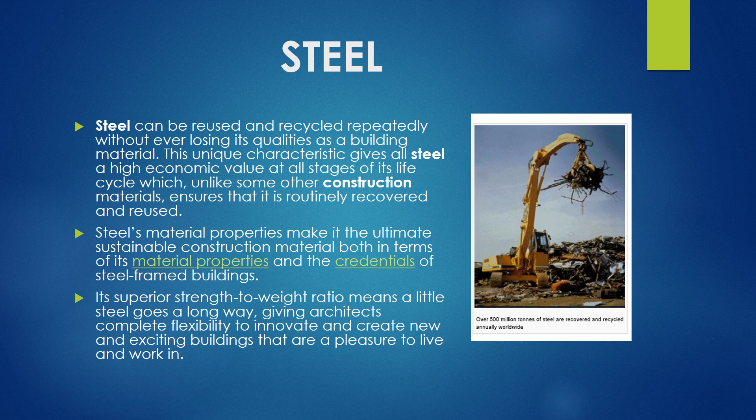Sustainability, green buildings, is our next topic. Steel is one of the most sustainable building materials in the world. The industry has embraced the common sense approach that reducing its impact on the environment is not only the right thing to do, but it makes economic sense. Since the early 1990s, the steel industry has reduced its energy use to produce a ton of steel by approximately one third. More than 95% of the water used in the steelmaking process is recycled and returned, often cleaner than when it was taken from the source.

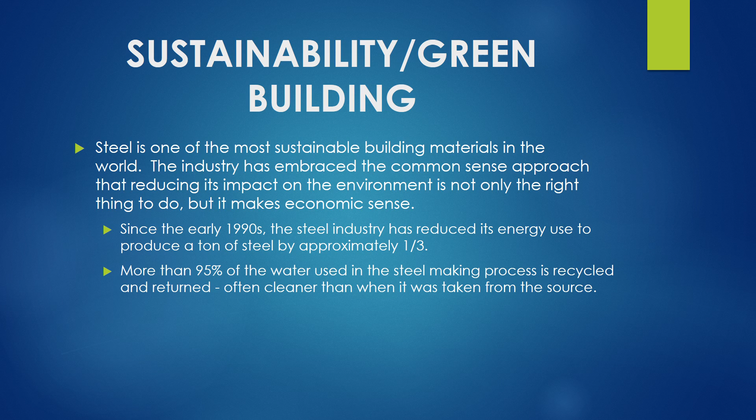Now for sustainability. Structural steel is the premier green construction material. Its high recycled content and recycling rate exceed those of any other construction material.

Over the past three decades, the steel industry has significantly reduced greenhouse gas and overall emissions. While numerous legislative and regulatory efforts in recent years have targeted emissions, energy efficiency, and related environmental concerns, the structural steel industry has been proactive in pursuing measures that typically exceed regulatory requirements. As the green building movement grows, more and more building owners, architects, engineers, and contractors are realizing the benefits of selecting structural steel framing systems as a means of meeting sustainable design and construction goals.

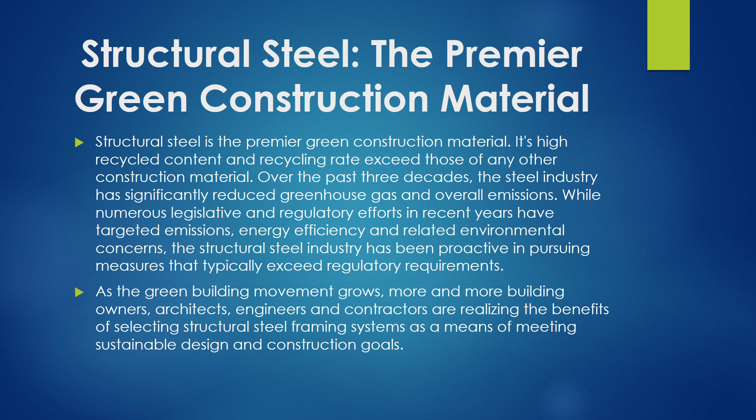The LEED Green Building Rating System, developed by the U.S. Green Building Council, has been crucial to this movement, and under LEED 2009 and V4 criteria, structural steel receives maximum credit for its contribution to the overall rating for a structure, due in large part to its recycled content, recycling rate, and transparency. Structural steel produced in the United States contains 93% recycled steel scrap on average. At the end of the building's life, 98% of all structural steel is recycled back into new steel products, with no loss of its physical properties. As such, structural steel isn't just recycled, but multi-cycled, as it can be recycled over and over and over again. It is truly cradle-to-cradle material.

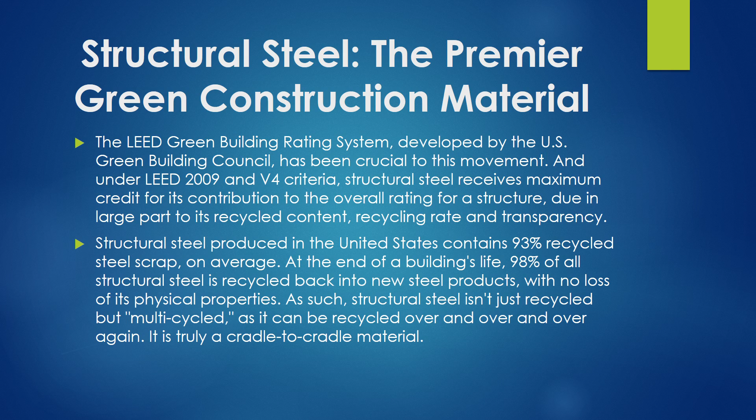Now for some history. The use of steel for structural purposes was initially slow. The Bessemer process in 1855 made steel production more efficient, and cheap steels, which had high tensile and compressive strength, plus good ductility, were available from about 1870, but wrought and cast iron continued to satisfy most of the demand for iron-based building products, due mainly to problems of producing steel from alkaline ores. These problems, caused principally by the presence of phosphorus, were solved by Sidney Gilchrist Thomas in 1879. It was not until 1880 that an era of construction based on reliable mild steel began. By that date, the quality of steels being produced had become reasonably consistent.

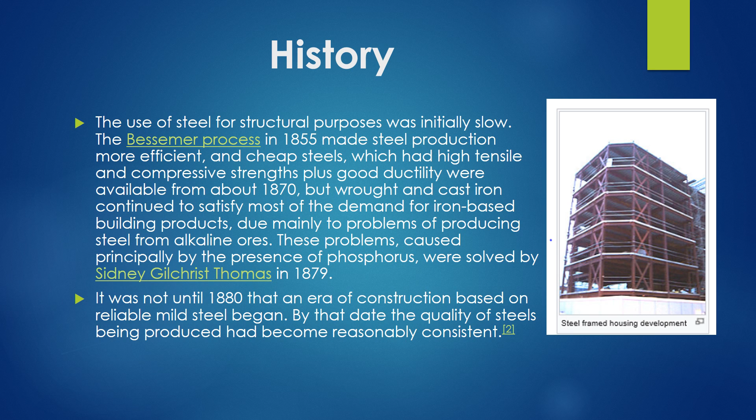We will now talk about the material steel. First, with steel alloys. Alloy steel is steel that has been alloyed with a variety of elements in total amounts between 1.0% and 50% by weight to improve its mechanical properties. Most commonly, the phrase alloyed steel refers to low alloy steels. Every steel is an alloy, but not all steels are called alloyed steels. The simplest steels are iron, alloyed with carbon, about 0.1% to 1% depending on the type. However, the term alloy steel is a standard term referring to these steels.

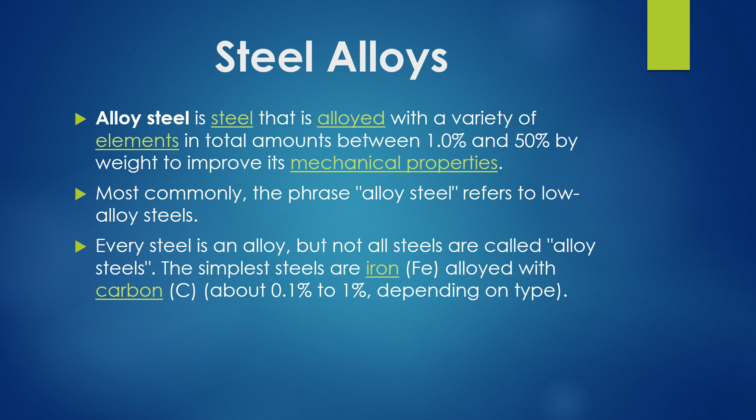Now to the production of structural shapes. Structural steel is a category of steel used in making construction materials in a variety of shapes. Many structural steel shapes take the form of an elongated beam having a profile of a specific cross-section. Structural steel shapes, sizes, chemical composition, mechanical properties such as strengths, storage practices, etc. are regulated by standards in most industrialized countries. Most structural steel shapes, such as I-beams, have high second moments of area, which means they are very stiff with respect to their cross-sectional area and thus can support a high load without excessive sagging.

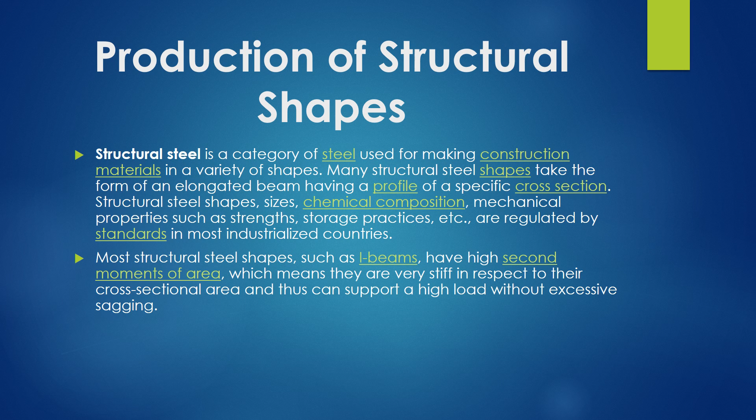Common structural shapes. We have listed a few here. We have the I-beam, an I-shaped cross-section. In Britain, these include universal beams and universal columns. In Europe, it includes the IPE, the HE, HL, and HD, and other sections. In the US, it includes the wide flange and H sections.

We also have the Z shape, half a flange in opposite directions. There is the HSS shape, hollow structural section, also known as SHS, structural hollow section, including square, rectangular, circular, and elliptical. There is the angle, an L-shaped cross-section, the structural channel, or C-beam, and the T, a

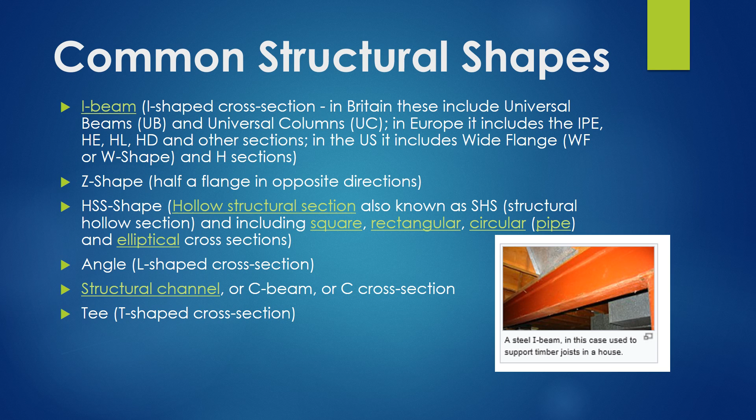T-shaped cross-section. We also have the rail profile, an asymmetrical I-beam. Under that, you have the railway rail, Vignoles rail, flanged T-rail, and grooved rail.

There's the bar, a piece of metal, rectangular cross-sectioned and long, but not so wide, so as to be called a sheet. There's a rod, a round or square and long piece of metal. You can also see rebar and dowel. There's the plate, metal sheets thicker than 6 millimeters or 1/4 inch. There is also the open web steel joist.

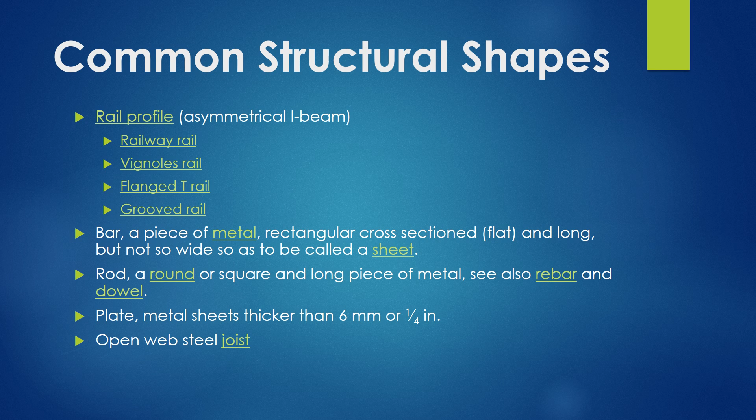Now we will talk about cast steel. Cast steel usually refers to normal carbon steel and alloy steel, also called steel casting, with carbon content lower than 2%. Therefore, there's no big difference considering the chemical content and raw materials for cast iron versus cast steel. One of its big advantages is design flexibility.

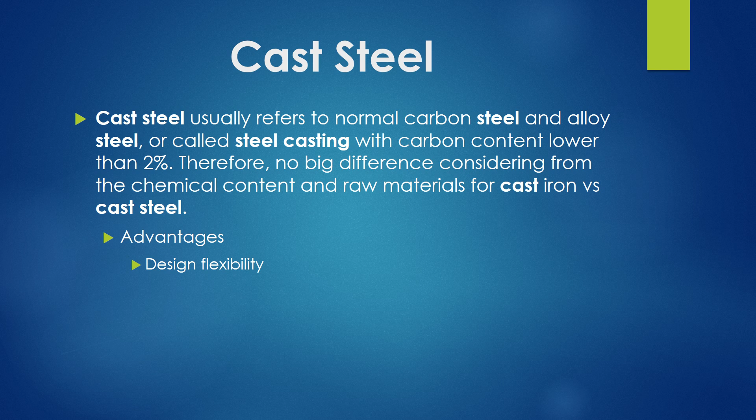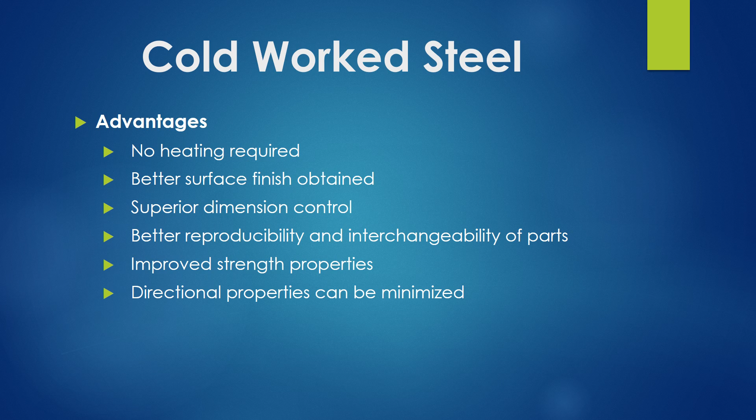We will now talk about cold worked steel. The advantages are there is no heating required, better surface finish obtained, superior dimension control, better reproducibility and interchangeability of parts, improved strength properties, and directional properties can be minimized.

Disadvantages to cold worked steel are higher forces required for deformation, heavier and more powerful equipment required, less ductility available, the metal surfaces must be clean and scale free, strain hardening occurs which may require intermediate anneals, and imparted directional properties may be detrimental.

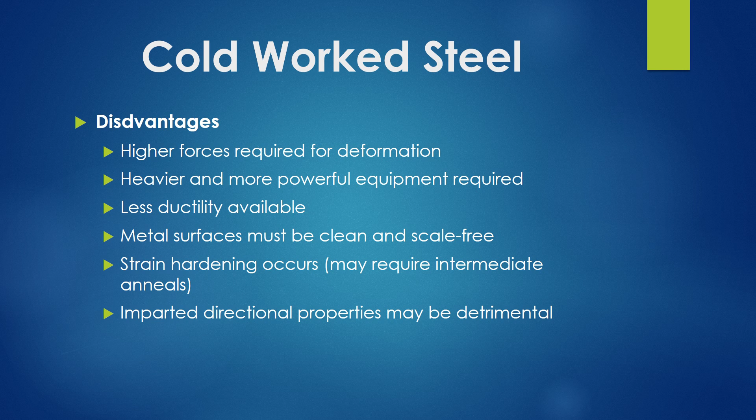We will now talk about open web steel joists. Open web steel joists, also shortened to OWSJ, is a lightweight steel truss consisting, in the standard form, of parallel chords and a triangulated web system, proportioned to span between bearing points.

The main function is to provide direct support for roof or floor deck and to transfer the load imposed on the deck to the structural frame, i.e. the beam and the column.

Engineers consider the joist span between bearing points, joist spacing, slope, live loads, dead loads, collateral loads, seismic loads, wind uplift, deflection criteria, and maximum joist depth allowed.

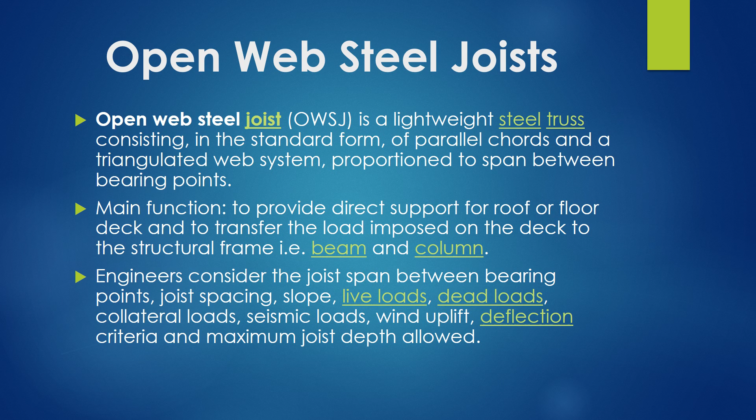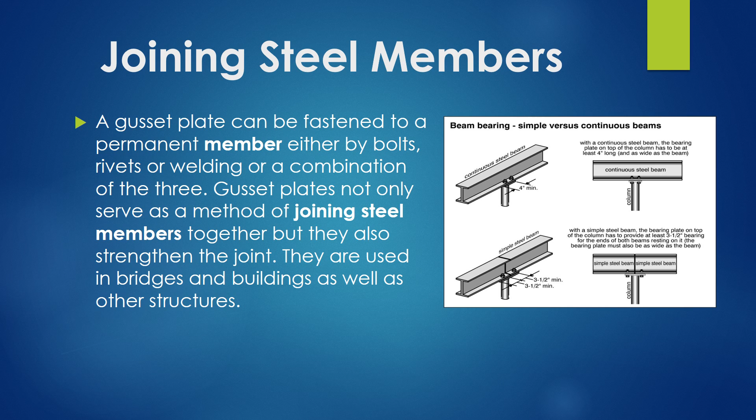We will now talk about joining steel members. A gusset plate can be fastened to a permanent member either by bolts, rivets, or welding, or a combination of the three. Gusset plates not only serve as the method of joining steel members together, but they also strengthen the joint. They are used in bridges and buildings as well as other structures.

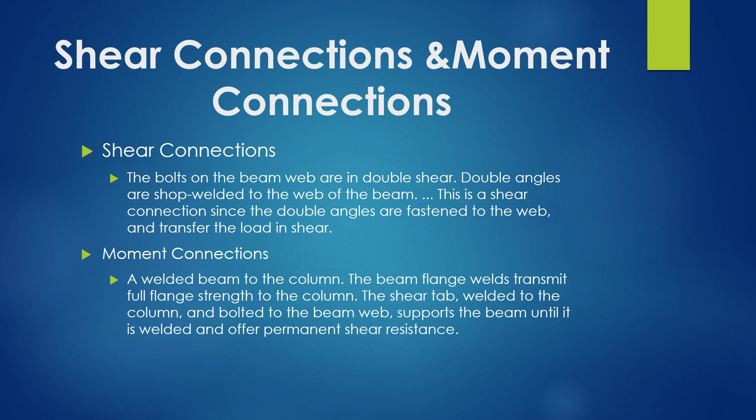We will now talk about the construction process. First, we have the fabricator. Metal fabrication is the building of metal structures by cutting, bending, and assembling processes. Pre-stressing may be achieved either by pre-tensioning or by post-tension. And the steps in the process are cutting, bending, and assembling.

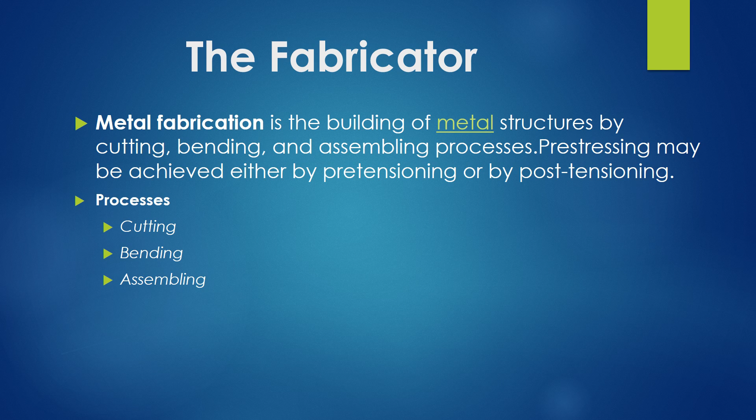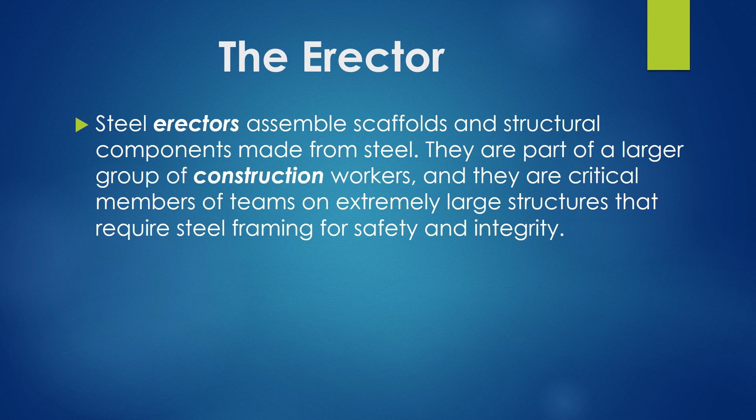Next, we have the erector. Steel erectors assemble scaffolds and structural components made from steel. They are part of a larger group of construction workers, and they are critical members of the team on extremely large structures that require steel framing for safety and integrity.

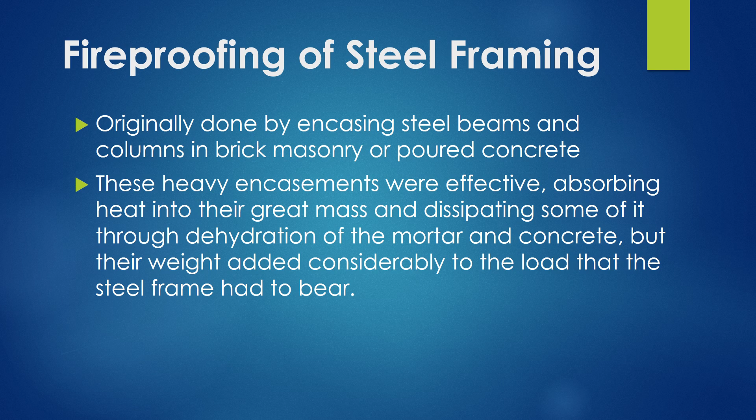Next, we have fireproofing of steel framing. Originally, this was done by encasing steel beams and columns in brick masonry or poured concrete. These heavy encasements were effective, absorbing heat into their great mass and dissipating some of it through dehydration of the mortar and concrete, but their weight added considerably to the load that the steel frame had to bear.

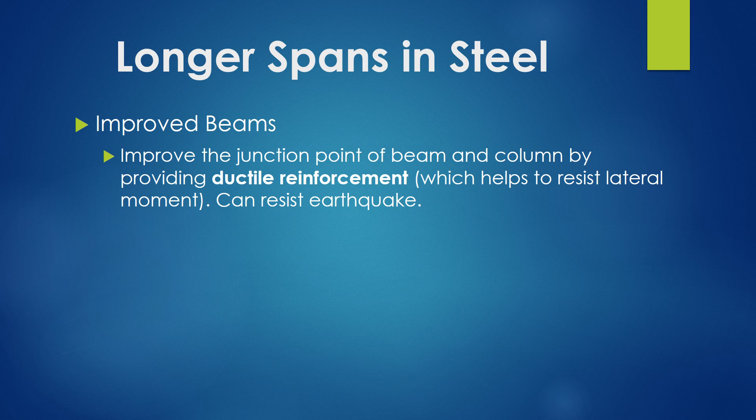Longer spans in steel. This we will talk about is improved beams, improving the junction point of the beam and column by providing ductile reinforcement, which helps to resist lateral moment. It also, with this, can resist earthquakes.

We'll now talk about arches. The arch is useful because many building materials, including stone and unreinforced concrete, can resist compression, but are weak when tensile stress is applied to them. An arch is held in place by the weight of all of its members, making construction problematic. Several types of arches are circular and semicircular, horseshoe, pointed, and parabolic.

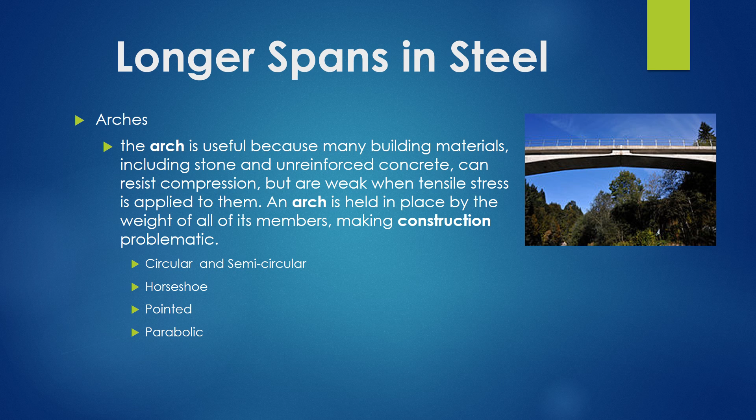We will now talk about tensile structures. It is a construction of elements carrying only tension and no compression or bending. Most tensile structures are supported by some form of compression or bending elements, such as masts. A tensile membrane structure is most often used as a roof, as they can economically and attractively span large distances.

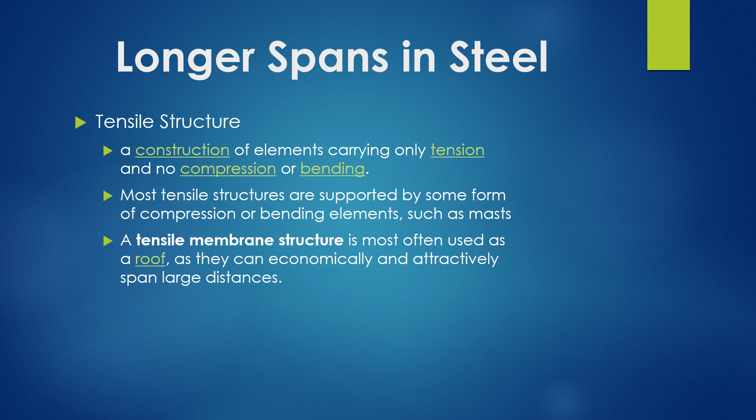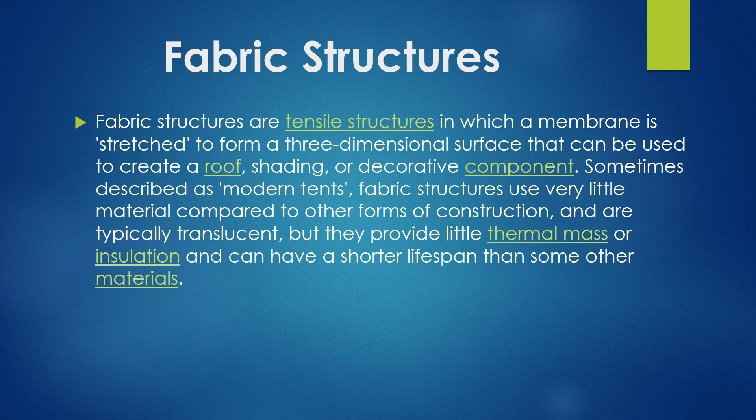Now for fabric structures. Fabric structures are tensile structures in which a membrane is stretched to form a three-dimensional surface that can be used to create a roof, shading, or decorative component. Sometimes described as modern tents, fabric structures use very little material compared to other forms of construction and are typically translucent, but they provide little thermal mass or insulation, and they can have a shorter lifespan than some other materials.

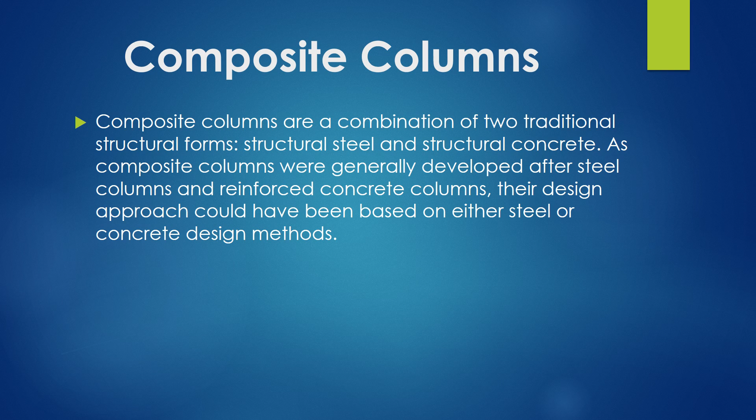Composite columns. They are a combination of two traditional structural forms, structural steel and structural concrete. As composite columns are generally developed after steel columns and reinforced columns, their design approach could have been based on either steel or concrete design methods.

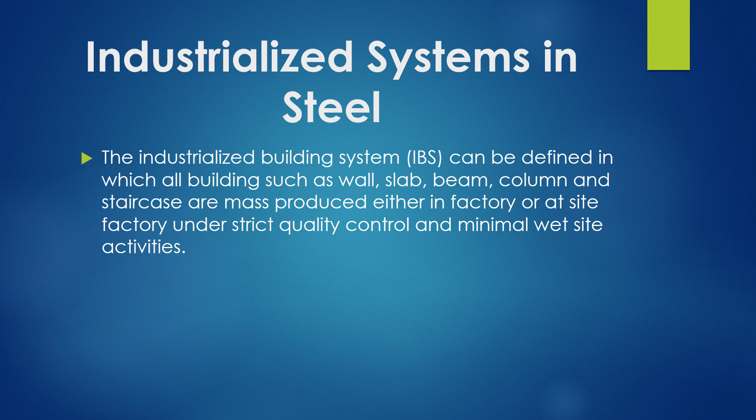Industrialized system in steel. The industrialized building system, or IBS, can be defined as one in which all building elements, such as a wall, a slab, beam, column, and staircase, are mass-produced either in a factory or at a site factory under strict quality control and minimal wet site activities.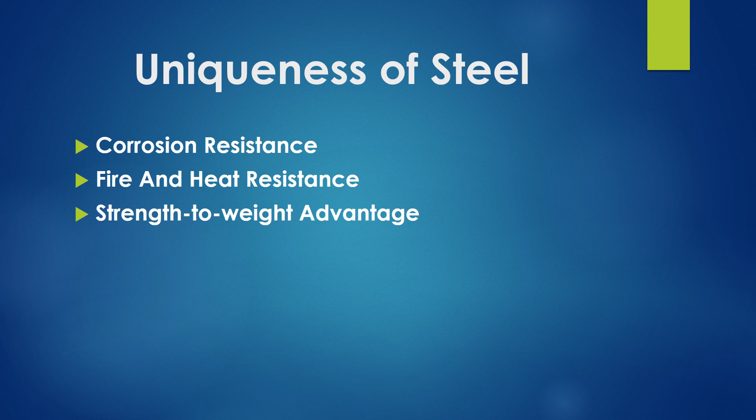The uniqueness of steel. Some of its qualities are corrosion resistance, fire and heat resistance, and strength-to-weight advantage.

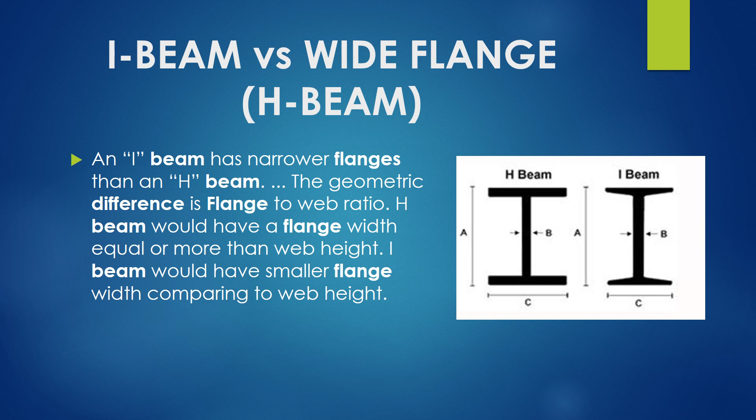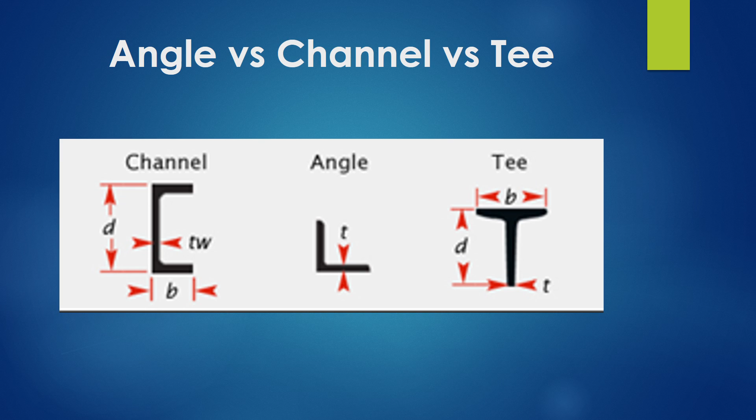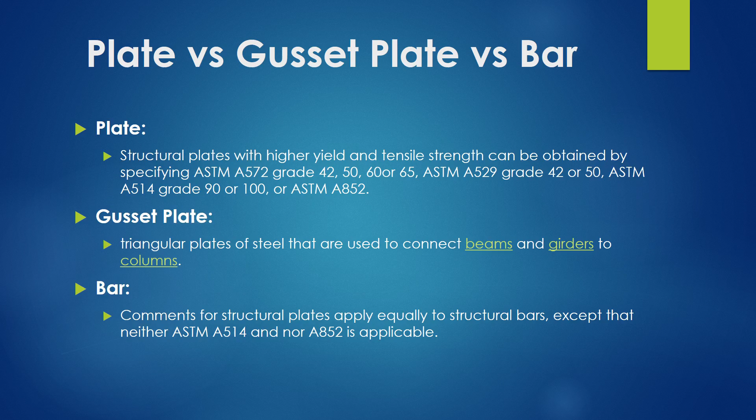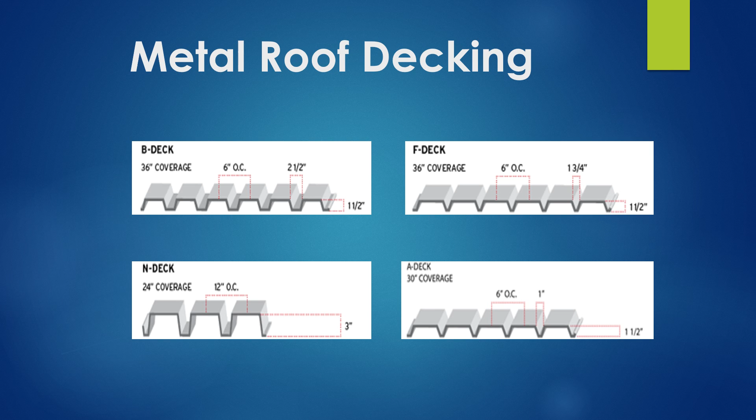Here are some diagrams of metal roof decking. We have the B deck, which has 36-inch coverage, an F deck, which also has 36-inch coverage, an N deck, which has 24-inch coverage, and an A deck, which has 30-inch coverage.